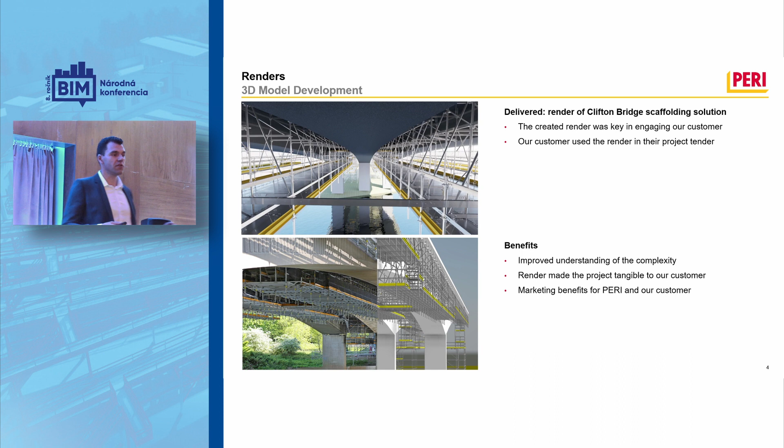The other use case that we have is a provision of laser scanning and modeling of an industrial complex bundled together with provision of scaffolding. Here, one of our lessons is that scanning today, in terms of cost, has absolutely no difference to the good old measure and model approach. However, it delivers fantastic benefits in accuracy of understanding the structure in terms of dimensions and geometry, and provides, and this is a statement that I really like, certainty in delivery and execution.

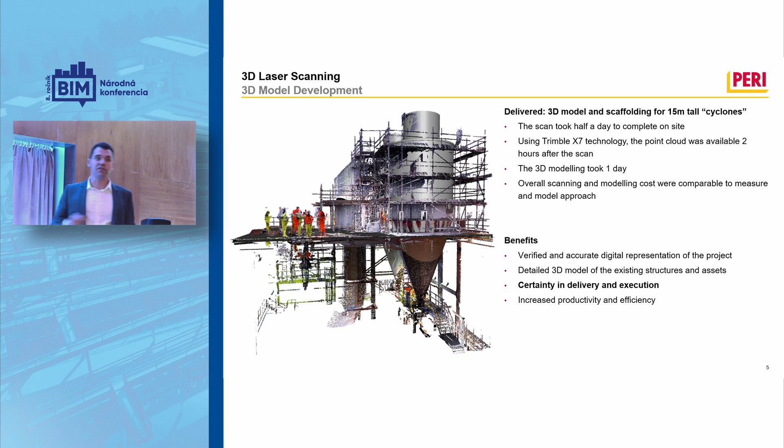This provides us and our customers a very good opportunity to be better, to be faster. We can provide solutions that work faster. We can save on the duration of the project. So if I imagine such an industrial facility that operates at a profit of sometimes a couple hundred thousand euros per day, what kind of benefits does one day bring?

The major use case here for us is a recent high-rise project in London called South Quay Plaza 4. It's a 56-story high-rise, and this is one of the first projects where we were involved with full BIM integration into the construction company's BIM workflow. Here we not only delivered the 3D model with the embedded information, but we also got involved in the process of BIM and digital construction.

So one of the things that we actually did, we set up the information exchange points. We were present in collaborative reviews of the design together with other selected critical suppliers for the construction of that very complex building. And we delivered different renders and images that provided different benefits to the customer. Here, the typical BIM use case was proven. A very complex solution was understood in its entirety by our customer, the construction company. Furthermore, they were able to avoid issues on site before they happen.

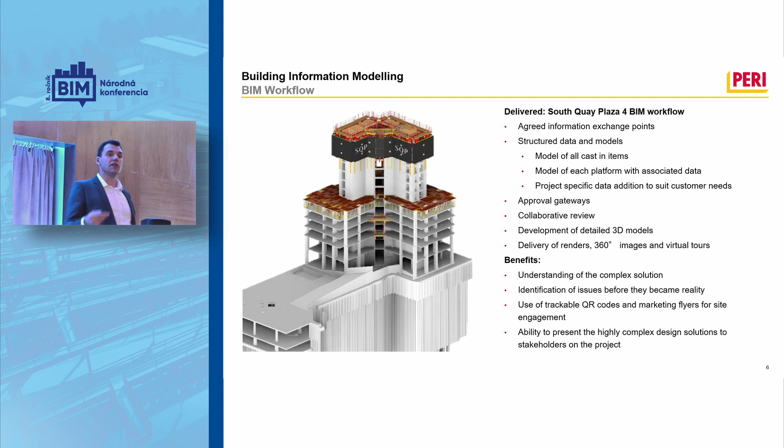For us, it was very interesting how innovatively they used the model, and they spread QR codes all around the construction site and used them to engage the site to gain different advantages when it comes to safety, efficiency, and risk management. Last but not least, again, one of the trivial things, but having that geometrical representation of very complex solutions, they were able to explain it to people who don't come from construction, people who are not experts in constructing such challenging structures.

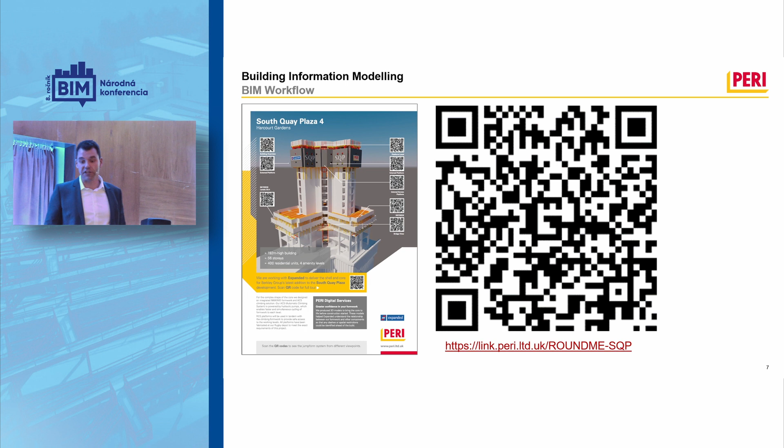A couple of examples of how that actually works on site. This QR code you can scan with your phone, and you can actually see what the guys on site could see. It's going to be repeated for a couple of slides, so if you want to go ahead and see it, you can scan it and check that one out.

So the first one was just a simple act of getting around a construction site. This is a very constrained environment; sometimes it's like a labyrinth. If you want to go somewhere, you really need to understand what you are doing, where you are going, and how you're going to get there. So there was a simple layout on an info board with the layout of the core, and everybody who wanted to go somewhere could just take a picture of a QR code and find his way to where he needs to be to do his job. Very simple, very effective. We actually had 180 people use that QR code on site. Of that, 80% were unique.

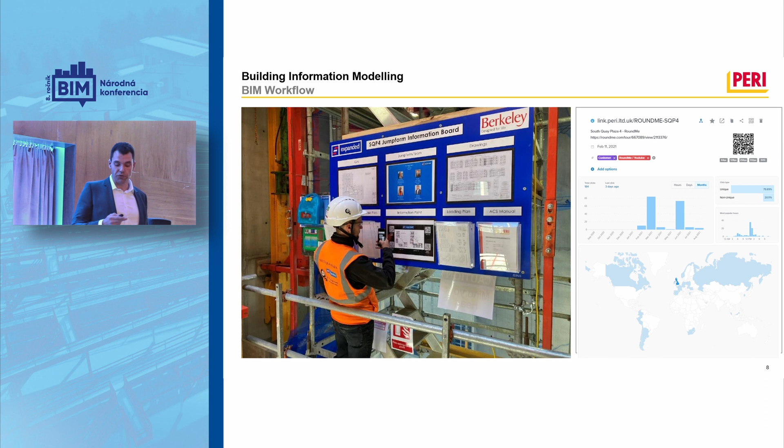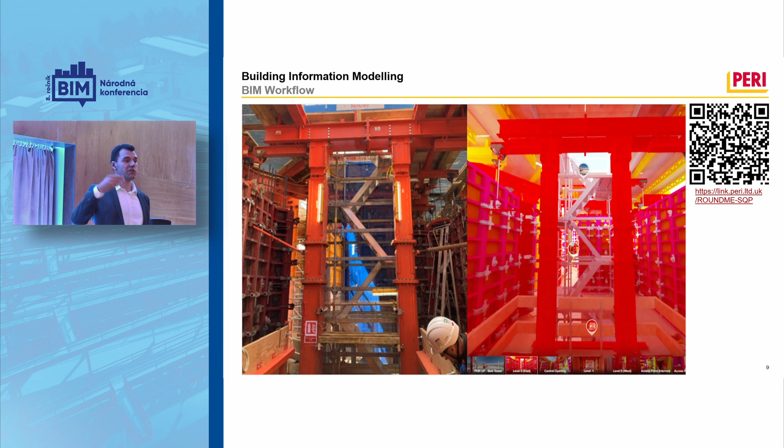Here also a nice example, side by side from the site, of how they improved safety on site. On the right side, you see the model where that stair tower is designed to a standard safety level, meaning nobody can fall off it. But when the safety engineer reviewed the model, he said, oh, no. This is a high-risk environment. We want to be above the standard. So if you see the picture, we actually created a full cage around their staircase so that nobody can fall down. And this was all done proactively. So there was no correction, additional deliveries, additional assemblies. Everything was done within the scope of the delivery and the first assembly.

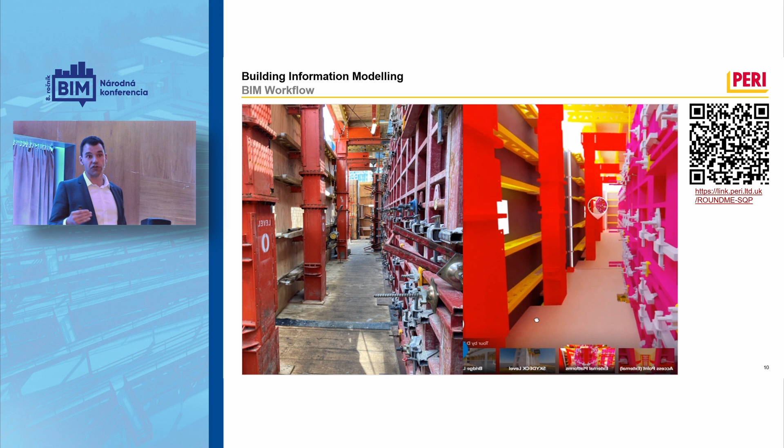Second was efficiency. So as I said, the jump form is a very constrained environment in which movement of people, equipment, and materials has to be sequenced. It has to be like a time clock to be efficient. So normally, a construction company takes about 4 to 7 weeks to figure out how everything works, so that they get to full performance. Here, this was actually done using the 3D model, and they drastically shortened the learning curve of usage of this very complex piece of equipment on site.

Last but not least, moving such a big 100-ton machine is a very critical operation. It requires operation of hydraulic devices, which are always a challenge on site because you need very good, very well trained people, and using the 3D model, the customer, the construction company, was actually able to fully train the people to operate, and everybody knew where they need to stand at what time and what tasks they have to do.

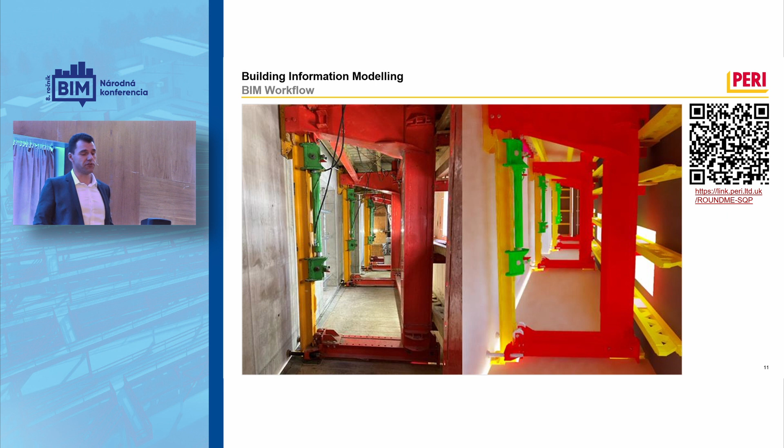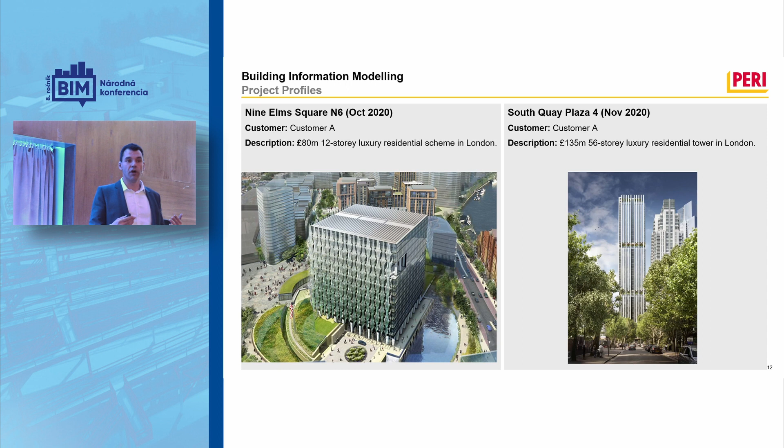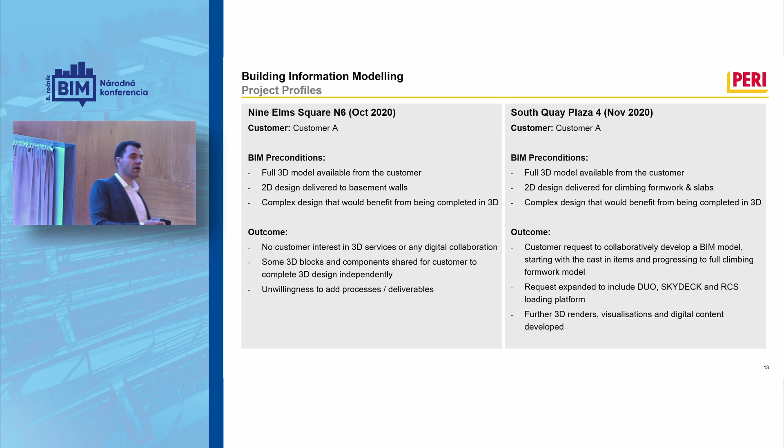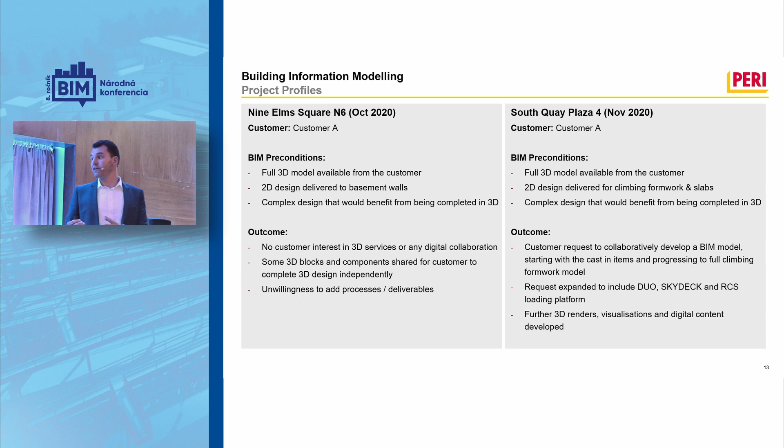Now, all these benefits are very good, but engaging this particular construction company, we found out that they don't always use the same scope of BIM when they work with us, so we wanted to understand this better. So we went and talked to them and compared 2 different projects going on in London at the same time, very comparable. They had the same preconditions. They were perfect for BIM. The complexity was there. The 3D model was there. But for one, they only asked us for some small information, and they went off and did all the BIM modeling themselves. And on the other, the example that we show, they fully integrated us into the process. So we wondered, why is this so? So we talked to them and they told us one thing.

Okay, the project that we did without BIM, there we had financial focus, and on the other side, we had quality focus. And let me explain this. Financial focus: there, both the construction company and the investor had a motivation to be financially cost effective. What they did, all the complexities were either managed, meaning they understood fully what's going on, or simplified. So they would either manage it themselves or they removed the complexity.

With the South Quay Plaza, the complexity of the structure was a little bit higher and the demands of the investor were extremely high. Thus, they could not avoid the complexity. They had to manage it. And that's why they integrated us together with other critical suppliers into their workflow in order to jointly develop the construction method that will be optimum on site.

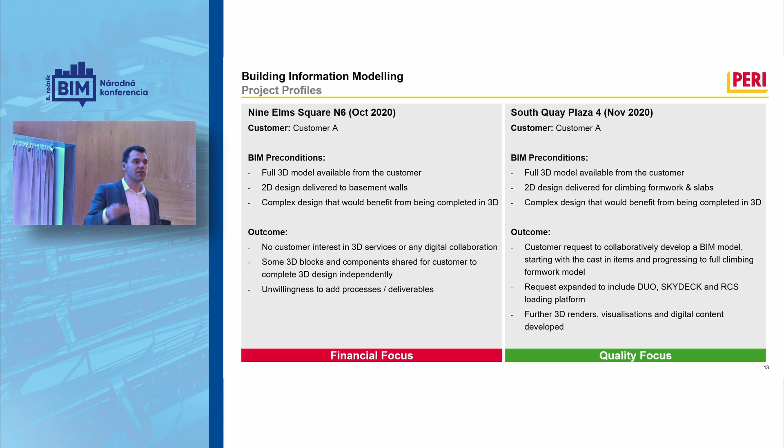Now, we also took a look at different customers. We saw that they don't really act the same, and we found that only 2% by count of our customers are true digitizers. This means they won't talk to us if we cannot provide BIM and digital construction. 10% are digitally engaged. This means they will have BIM requests, but they will vary from project to project based on the requirements. And the 88%, they don't care about digital. Those are the guys who really still appreciate that simple render.

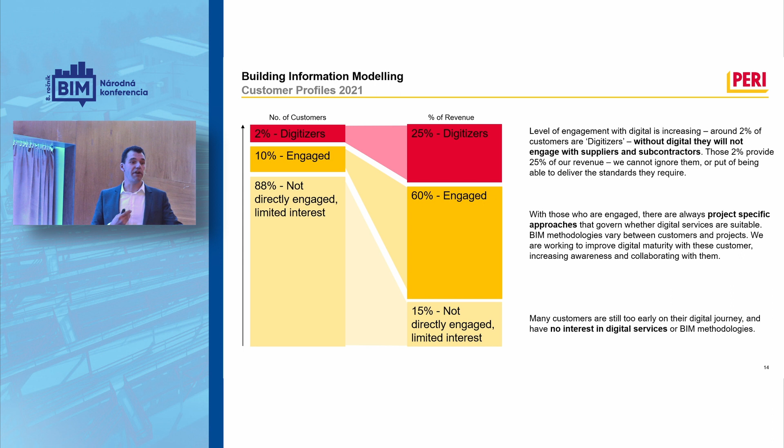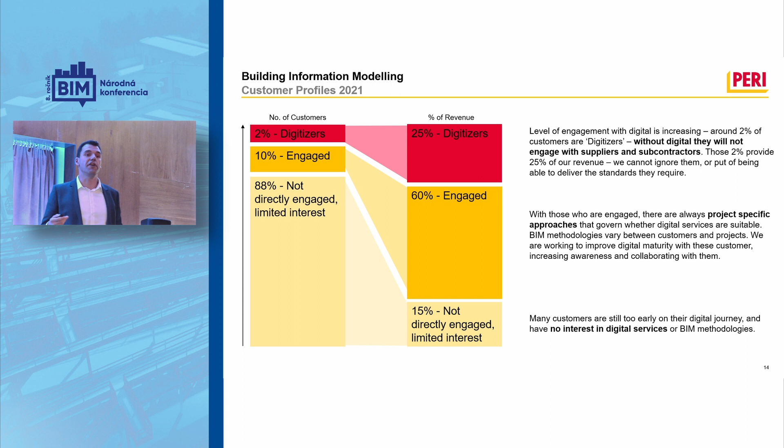What is interesting for us is the scale of revenue we do and what kind of impact those 2% of digitizers have. They correspond to 25% of our revenue, and they actually influence the other 60% of the engaged customers. Why is that? Because digitizers are generally either main contractors or investors who set the requirements for a project that others have to follow.

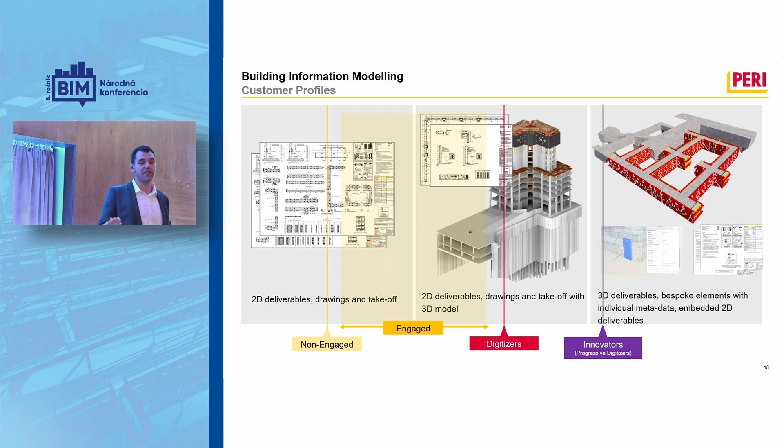Knowing that, we aligned our value proposition. We said we clearly define who does what for which customer in which process. This was, however, not an easy task. The biggest challenge was to understand what our customer wants if he doesn't understand it. And how this actually changed, we saw the emergence of the digital engineer. He emerged on the construction side company. This was a person who was collecting data from us, putting it in small use cases and testing it on the construction site. And through time, the construction companies were able to define their requirements towards us, what we need.

This actually presented us with a challenge of how do we align with those requirements. And in the end, what happened? We actually employed one of the digital engineers of our customers in order to help us support and develop the technology, hardware, and skills required to do that. But not only that, adapt our processes to the correct interaction with the customer based on the customer profiles that we saw just before. I really want to thank Anna. She's one of our strongest BIM, actually digital managers these days, is managing a very strong team of digital engineers, and she strongly contributed to this presentation today.

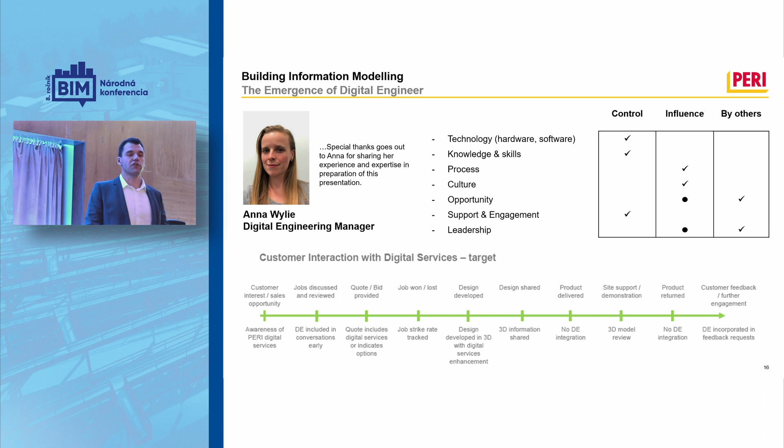So this was looking into the past, looking into the results, but what about the future? I said before, two types of projects: financially driven, quality driven. What if everything was quality driven? What if there was total transparency on the construction site? Well, we have a partner that's actually working towards that. They're called Scaled Robotics. Don't be confused by the name. They started with hardware and moved into software. And these days, they actually have an AI platform in which a scan from a construction site is uploaded. That platform analyzes the results and delivers automated quality control or automated progress tracking.

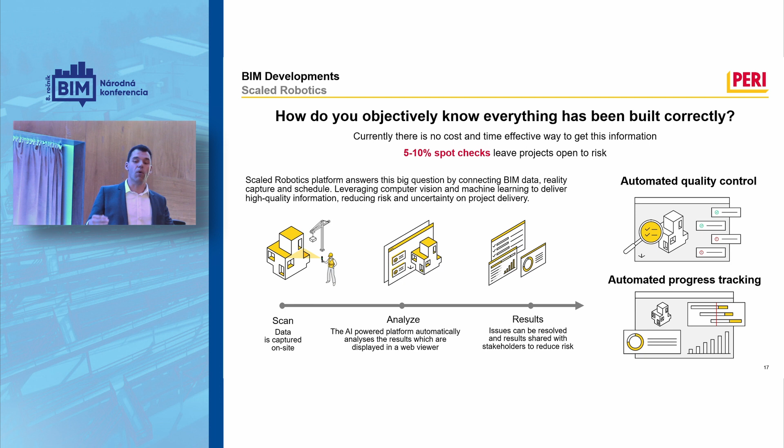How does that look? The result is actually that. A model from the site, color-coded, which shows you what is built, if the structure that is built is within tolerance or outside tolerance. The tolerance is to be defined by the user. What is not built, and that's it. So very simple, and in 3 days, after going around the site with a small handheld scanner, you get the result as you see up there on the screen. So there is full transparency. There is no more hiding.

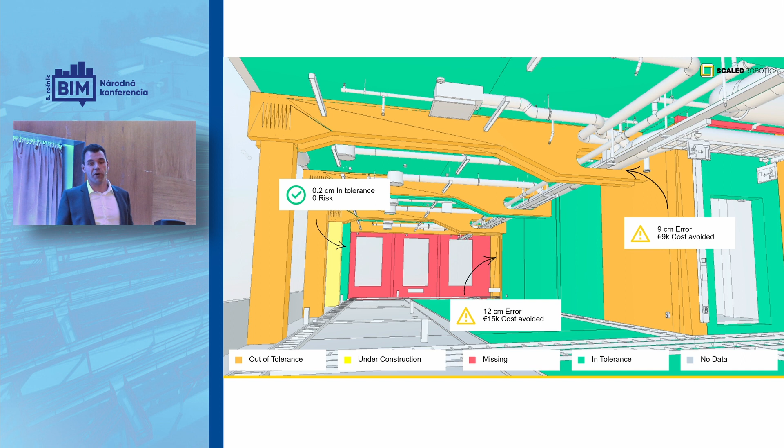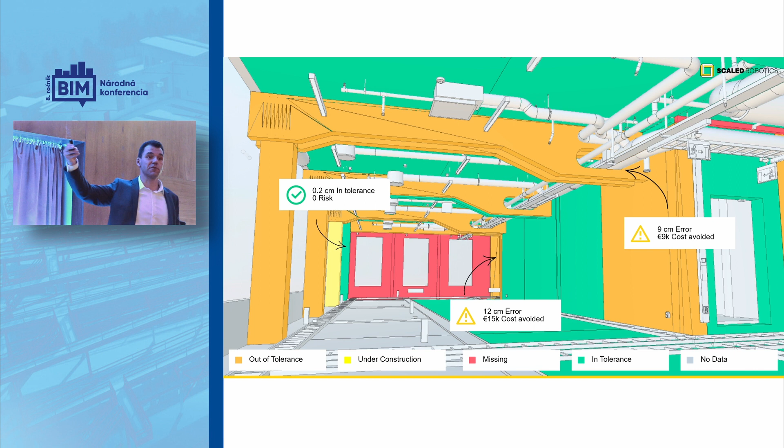Imagine a situation today. A construction company builds a lift shaft. The door of the lift is offset by a couple centimeters. Nobody knows this. Nobody notices until the guy who's installing the elevator comes and sees, oh, the door is in the wrong position. Good luck to you talking to that construction company who has already been paid and has moved to the next project to come back and repair that error.

So our partners, they claim that they multiply the output of a digital engineer 30 times. I cannot claim that's true or not because I don't have the experience with it. What I do know and what I do understand is that if this and similar technology provide that 100% transparency on a construction site, the process will drastically change. So in terms of scanning, for me, what is interesting is who scans what at what time. If the investor will scan the whole building in terms of managing the control, does the construction company scan the concrete after it's been poured? Or does he scan the formwork that I have to provide in order to ensure that the mistake never happens?